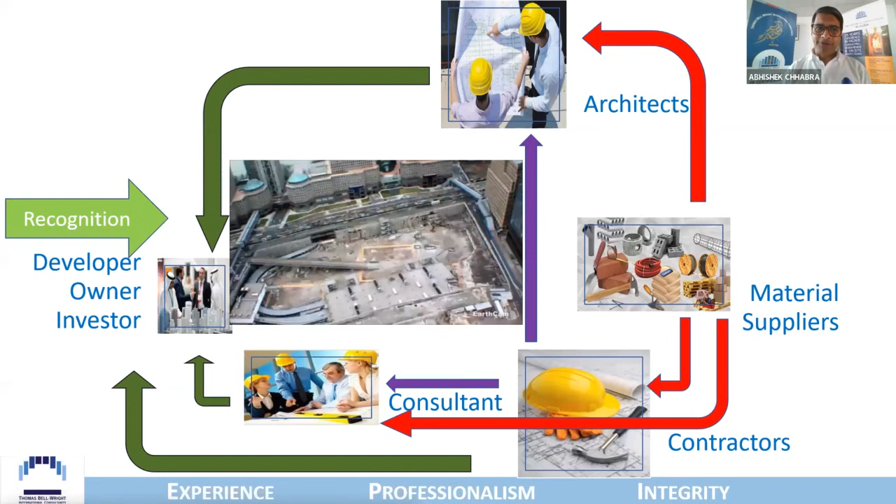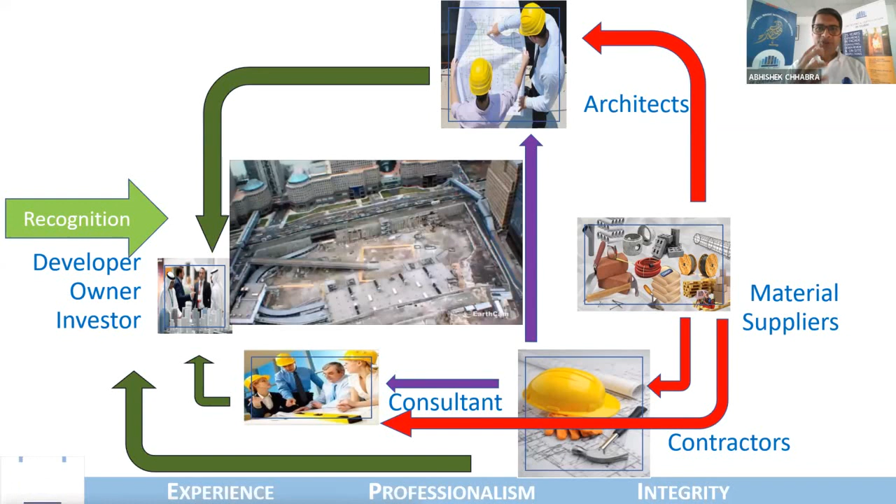They want the contracting companies to be able to order them. They want the specialist consultants to know what these materials are. So now, with this kind of an understanding that the audience has about the relationship, who is trying to advertise to whom, who is trying to sell to whom, we shift to the next stage of understanding: where does the money really flow?

Who pays whom? The owner, the developer, the architect, the investor typically would pay the architectural firm, would pay a consultant, would pay a contracting company. And it is the contractor who will pay the material seller. And this relationship, please freeze this image in your mind, because this is a very key image to understand where the liability is really flowing from.

Because in essence, who is the commercial entity who builds? The commercial entity who builds the building is the contracting company. It is the contracting company who will procure materials, who will hire subcontractors to use these materials and build. And this is done as per a framework, as per a specification document, which usually has inputs from the architect, from the consultant, from the specialist consultants. And I'm not talking of project management companies. This is just the core relationship.

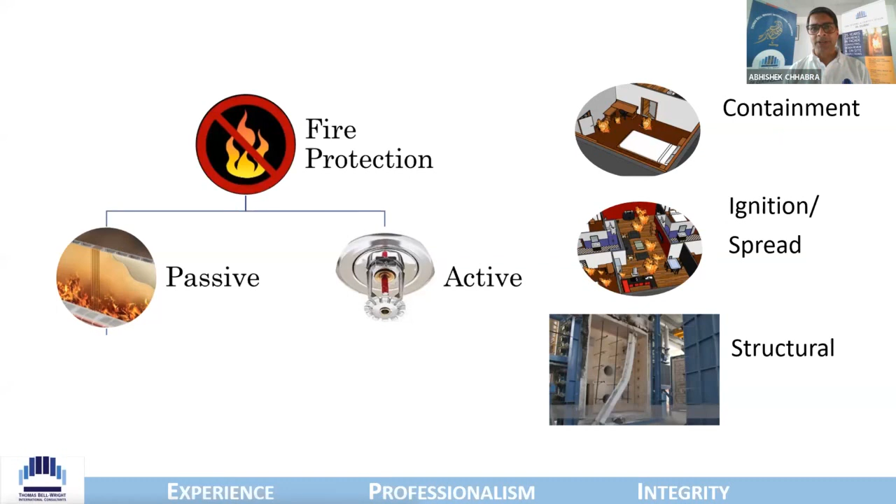I'm going to shift gears to what we always talk about, which is fire protection. And I'm hoping many of you have already attended the previous sessions and understand where passive fire protection really sits. So I'm going to walk through some examples so that the audience is with me when I try to drive down the relationship between stakeholders, between people like yourselves and others, and how things can change and should change.

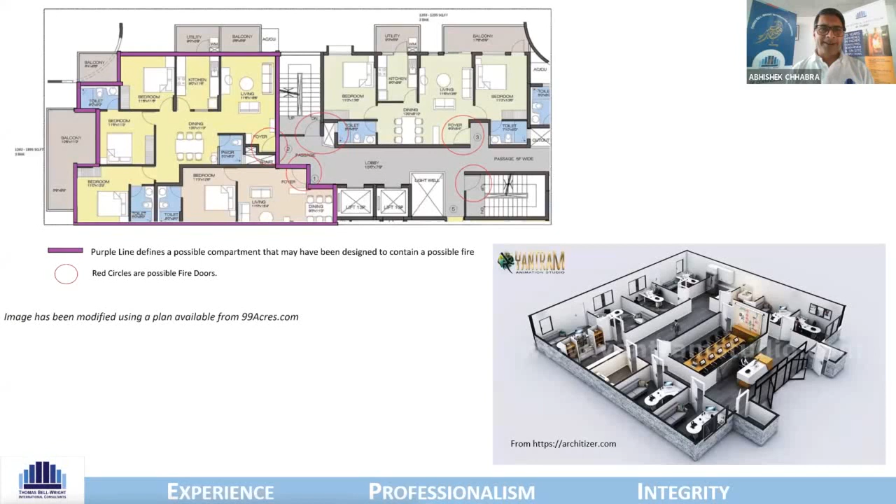And now all of these mechanical, electrical, plumbing, MEP works, as they are also called, are potential destroyers. With no offense, but what I mean to say is there is a compartment that has been created, that has been designed, that has been built, and this compartment needs to be cut open to allow the services to come in and out. And then it has to be resealed.

So this action, which I explained in one of my presentations, usually MEP works is about 35% of the budget. So the money spent, about 35% of the whole contract, these subcontractors can potentially derail all of the compartmentalization done. So it needs to be done properly.

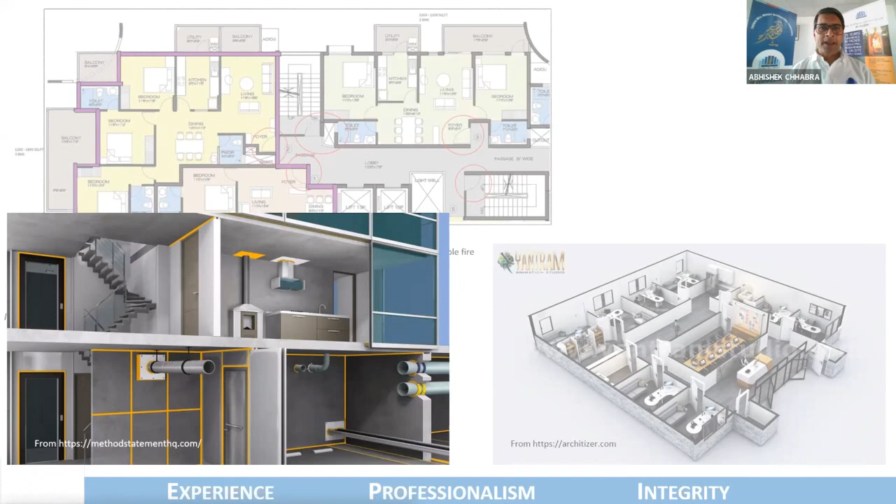But it is important to know and understand that they all need to be done correctly. And what is it that all of you must know and understand? That it is being done correctly. And it is not just the haggling of the contract and the matter is over.

Going back, quick revision to one of the older slides, fire resistance of a partition or a fire door could be tested in the laboratory, and you can all refer back to older sessions of how fire testing is done. But the point to know and remember is what all makes up this compartment. Fire doors, boards, hardware, through penetration, fire stopping, all of these elements need to be correctly procured.

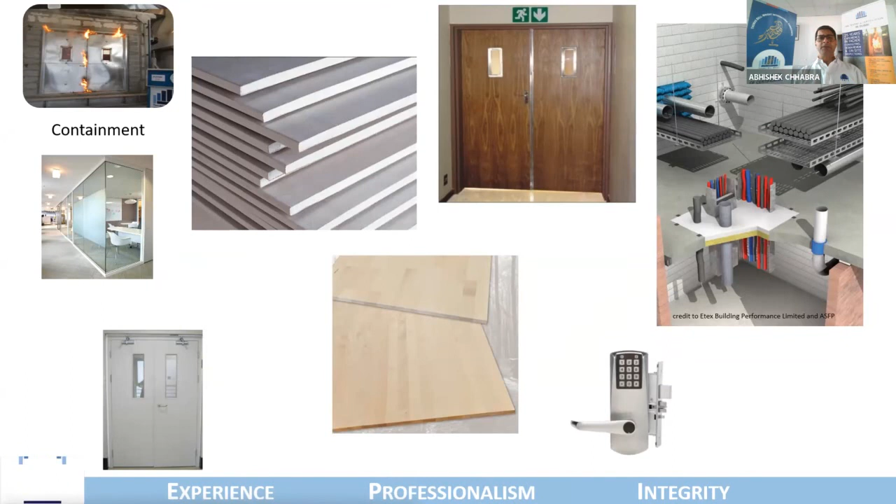And to be correctly procured, they need to be correctly specified in the contract with a commercial value attached to not specifying it correctly or specifying it correctly. And the same goes for installation and a mechanism in place to make sure that this installation is correct.

So all these stakeholders or many others that you are aware of are always bound by specifications and contracts. The technical definition of boundary of what you want to buy. Is it a product? Is it a service? And how that product or service is defined and what is the money attached to it.

So let's talk very specifically about certain stakeholders and the relationship between them. And I know that we have a good percentage of these stakeholders who are in the audience today. Let's start with the contract. Who has a contract with whom? The owners or the developers would definitely have a contract with the contracting company. They could be the same entity as well. This is depending on the type of organization.

The contractor will have a contract with the material suppliers, which means it places an order on them, and there is a definition of what is being placed as an order on them. The owner of the building, it could be the resident, it could be the tenant probably, has a contract with the facility management company or someone who is taking care of renovation and change.

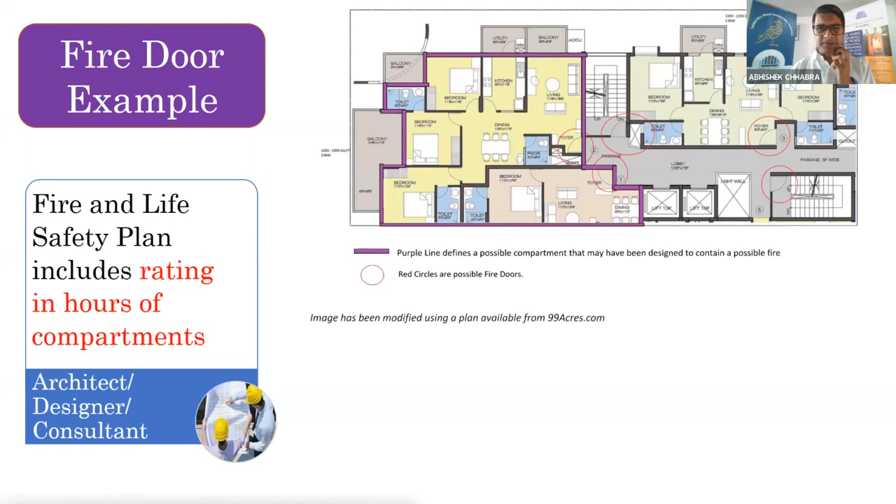So let's move to an example of a fire door from a very practical point of view, the way it would ideally get done internationally. For example, if it's a large commercial building, the floor plan designed will have the fire and life safety plan, lots of things. Let's talk specifically about compartmentalization. Depending on the type of occupancy, the compartmentalization is designed, 2 hours compartment needed as an example. So all the fire doors on that compartment across the floors will be specified to be 2 hours.

And this leads to what is called a door schedule. And the door schedule is the master document for the contractor to roll out an RFP saying, bid to me that you comply, that you are a 2-hour fire rated door. And this is where the responsibility of the contractor comes in.

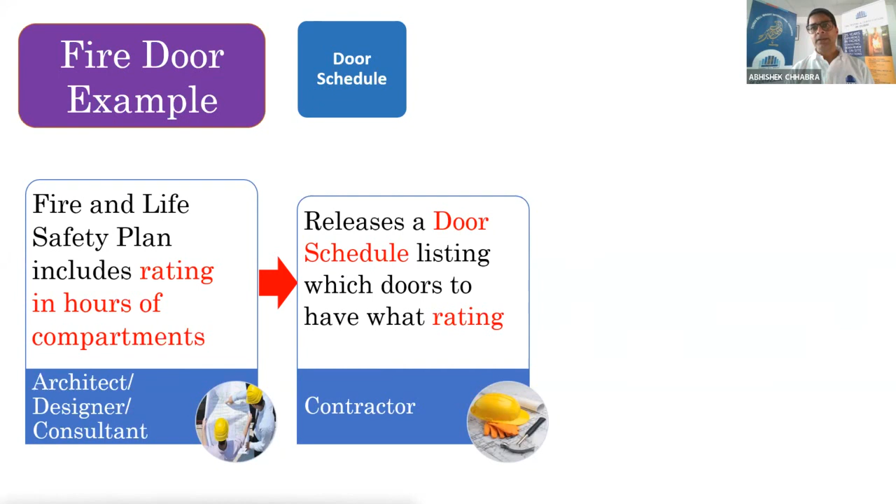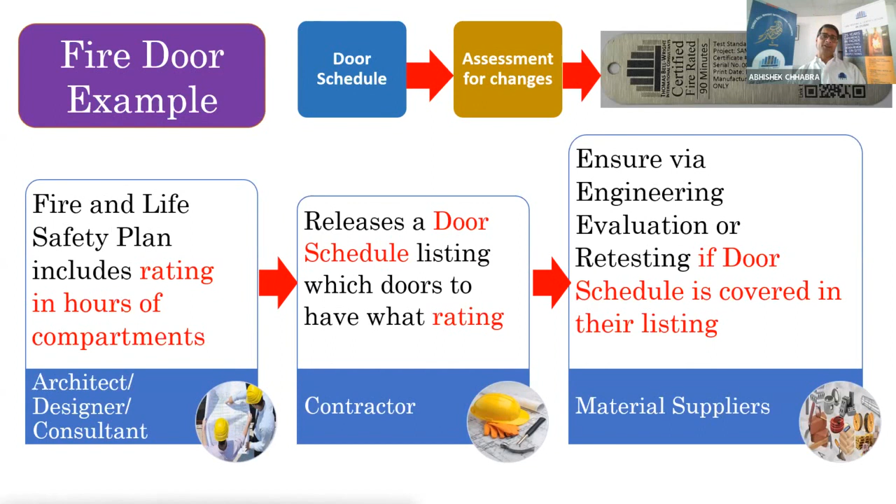What evidence do you really rely on? Is it a test report where you have no way probably to cross-check what was tested and what you're buying? Or is it certification and listing, where there is an online portal to verify how the certified product looks, what all it contains, and the same can be inspected with the help of a fire door label or any kind of a label to make sure that it is correct or not. And we can discuss this.

For those, this is just a quick revision of what certification and listing really provides. It is a cyclic process where the third-party entity, which is a certification body, and this could be a company like Thomas Bell-Wright, FM or UL or one of so many, takes on the responsibility of maintaining an online checking portal where you can verify that if a product carries a certification mark, then it will comply to certain standards.

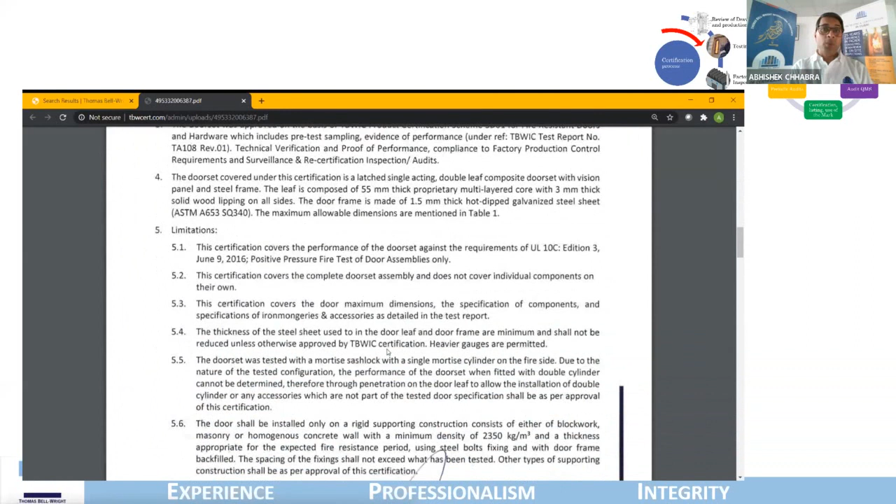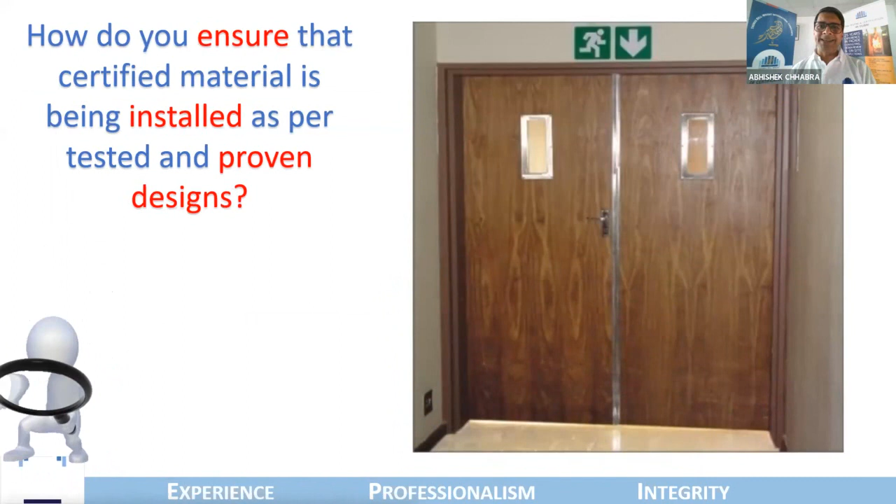Where is it manufactured? And it is something which is inspectable, which means, for example, if it is a fire door which is claiming to comply to IS 3614, then there exists an online mechanism to verify that the factory is being audited regularly to make sure that it is manufacturing the product, and it can be inspected when it is installed.

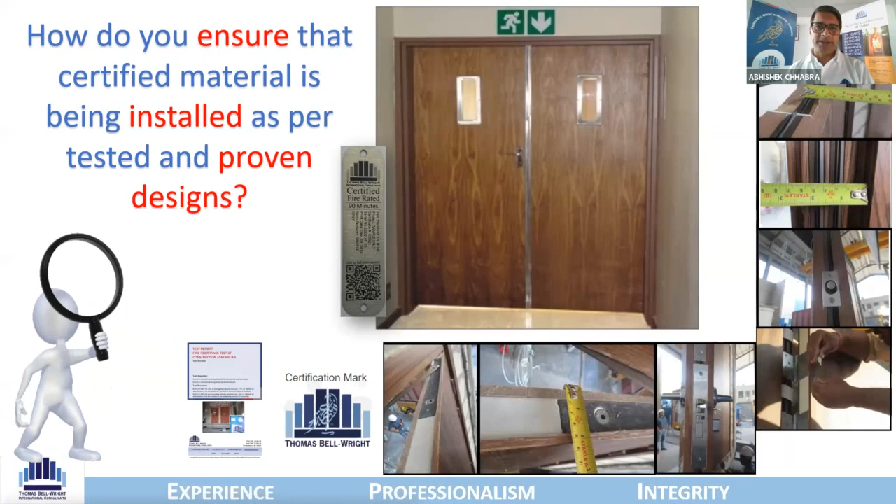And I want to very quickly show you that inspection as a concept is a legal requirement. It is part of codes in America, in the UAE. It is part of the code and it is legislated how the inspection should be done and what all things need to be checked. And in many countries, inspection is mandated every year. And there are some excellent inspection standards.

A classic example is NFPA 80, which is a standard for fire doors and other opening protectives. All sorts of openings are not only defined in how they should be inspected, but also responsibilities of retrofitting, inspection, etc. are defined in this standard, because things actually go wrong.

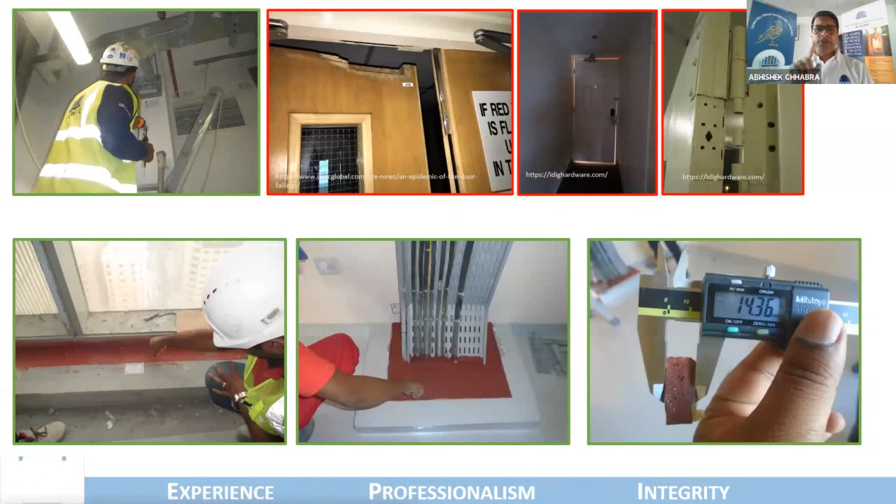If you look at the three images on the top right, you can see a fire door whose closer has been removed, or my favorite, the second image on the top, where the fire door is actually installed skewed. The installation is wrong, or hinges are gone. And there are so many things that can potentially go wrong.

And internationally, in all the other countries, there is a requirement of how inspection bodies are controlled. Inspection bodies like ourselves and so many others are audited by accreditation bodies on being able to do the inspection correctly. So once a year, there is a third-party expert who will chase my auditor in the field and check how he or she is checking a fire door or a through penetration being installed correctly.

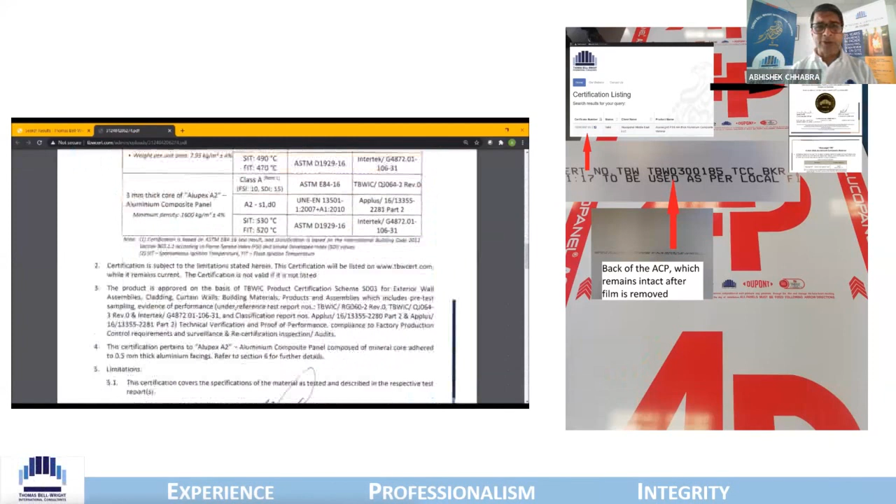And mind you, there are ways to check. Some of you would have seen this in the past from my slides: something like an aluminum composite panel, ACP, which does catch fire, you can go to the site. There is traceability. Companies like Viva in India, and many others like Everest, and there are quite a few. You can look them up on our certification directory.

Their products in the field will carry a certification number. And if it does not, then it is not part of the product which gets inspected, and you should not give it the premium that it is asking you, right?

So here's another poll question. Let me see if I can find this question. This is a very quick poll question that I want to open, because I'm hoping all the stakeholders did understand what I am talking of. So I want to know how many people in the audience have some capability to drive some change. Just asking the right questions.

Because even if you are capable of asking the right questions, things start to change. Just as an authority having jurisdiction, if you check: does a fire door have a label? Who has installed it? Who is taking the responsibility of installation? It is when you ask these questions that you start driving the change. If you have to buy any product and you ask the right questions, the salesperson would know, oh, I cannot give him the regular spiel. I have to get my senior who will be able to answer the right questions.

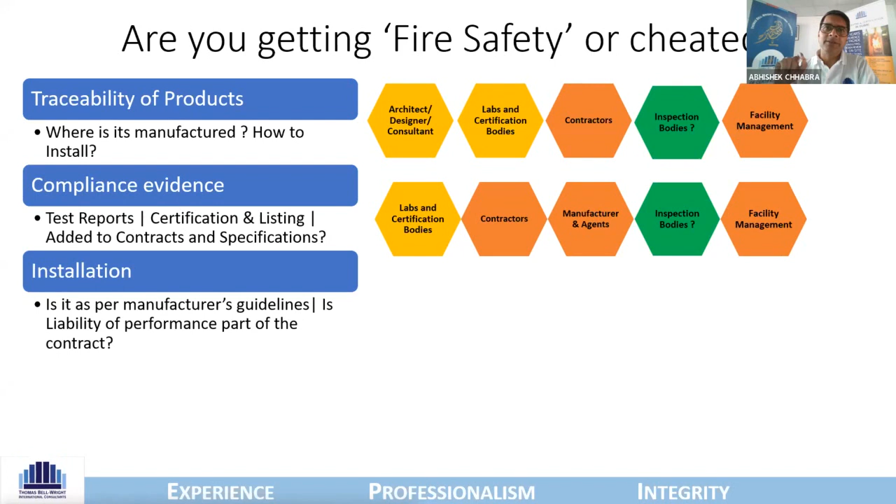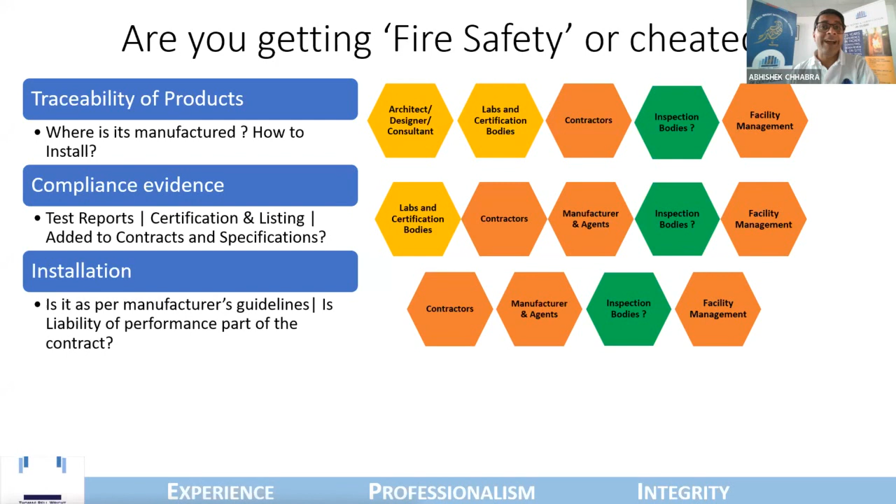Installation, the most critical and the least important, unfortunately, in most of the cases. Who is installing? Is it as per the manufacturer's guidelines? Who is taking the liability of an incorrect installation? Is it linked with the commercial value? Is the subcontractor fined or agreed that he is liable if the installation is wrong, if there is a fire? Who is responsible? Are you taking the services of an inspection body? And mind you, the moment you hire an inspection body, they are a party to the liability because they are making sure that the installation is correct or not.

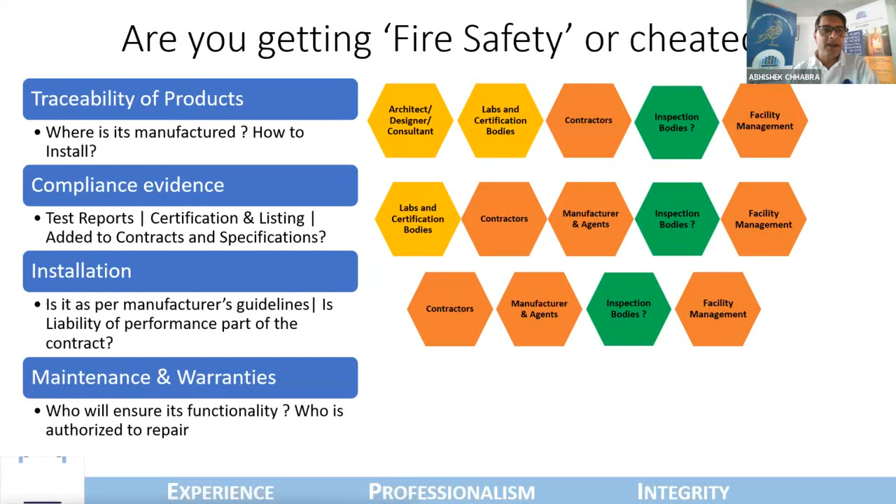Who is maintaining the product? Who is giving the warranties? Are the FM companies aware or not aware? All these questions need to be addressed when technical specifications are being written, when the contract is being written.

Whose responsibility is it? What is the responsibility of the contractor? What is the responsibility of the manufacturer? What is the responsibility of the certification body? Are all these things lined up with documentation or not? Are there stage payments linked with these requirements, with performance guarantees, with penalties? Are the penalty clauses there or not? So I leave you with this. This is the last slide for today's session. And I'm going to read some of the questions and I'm going to open the floor for questions.

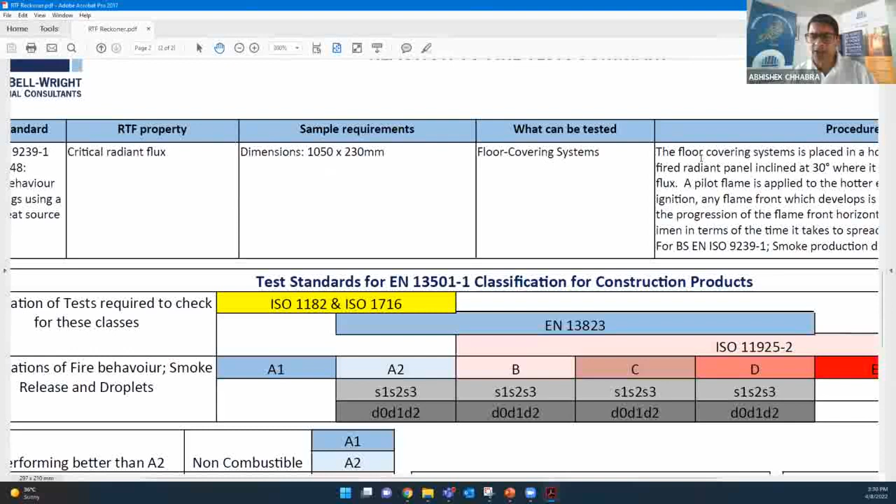There is a test method I'm just sharing on my screen as well. It is called the critical radiant flux test method. It is used for flooring and floor coverings. There are also what are called movement joints and sealants, which are put in on movement joints. So, for example, flooring of airports or hospitals or whatever, where there is a sealant which is put in between the movement joint, and there are compliance requirements for these as well.